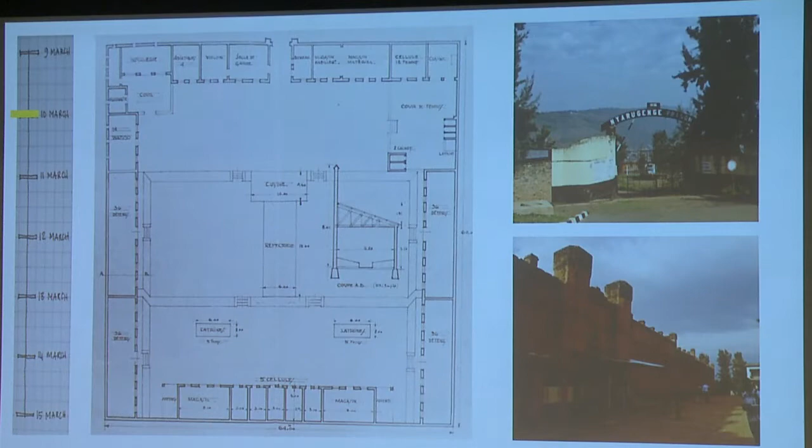And then the Belgian school, we were able to get access, but for that we unfortunately did not have any drawings. So there was a certain amount of information available, and the rest our students had to infer and assemble just by observation.

The workshop started with the Rwanda Arts Initiative, with Dorcy and a number of artists who came to present to our students and showed us their work, telling us what kind of spaces they would need and which spaces would be ideal to incorporate into the proposals.

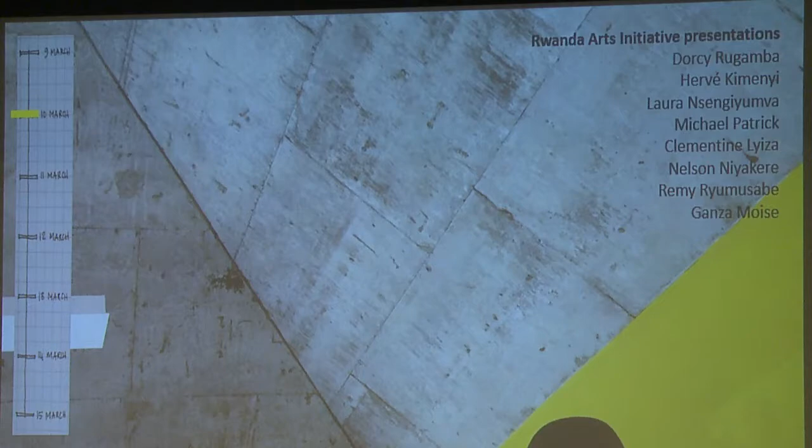From there the students also explored the local art scene in various ways. We went to the Inema Arts Center where some of them did artwork together with local kids, and a few of them also engaged in karaoke in Kigali Central. They immersed themselves in the life of Kigali and tried to experience as much of it as possible, just to get to know the place a bit better.

Work started in earnest on Monday morning. The students essentially had 4 days to work on the project. We started first thing on Monday and they had to submit by end of play on Thursday.

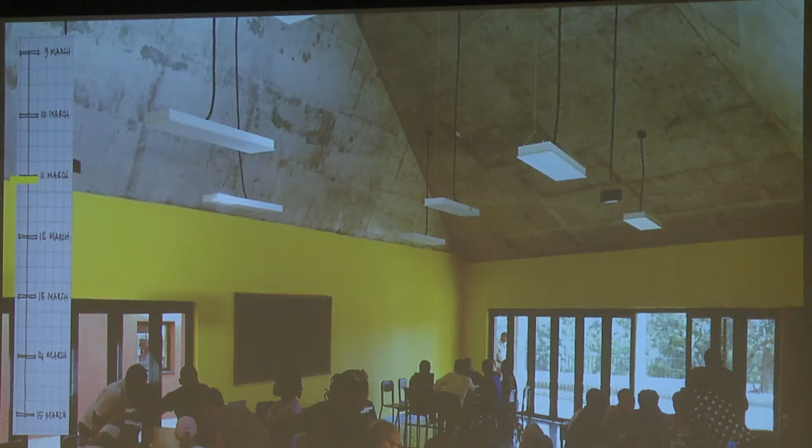The students from Uganda and from South Africa were challenged by the fact that they were away from home, and they had to improvise. With a lot of help from the local students they were able to get some laptops together, and they also used a roll of paper that Berend brought along, so a lot of hand drawing, and also some inventive use of apps available on their smartphones, which was really interesting to watch them adapt in the new environment.

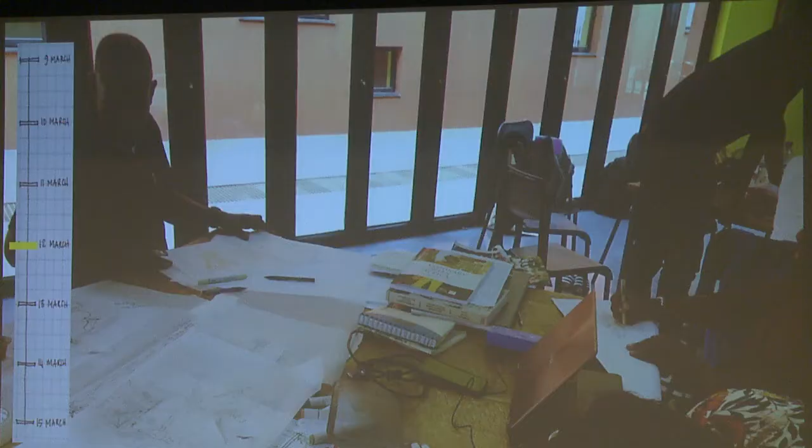So what we had was 2 moments - the workshop timing was divided into 2 moments, one aiming towards a target. We had 2 reviews.

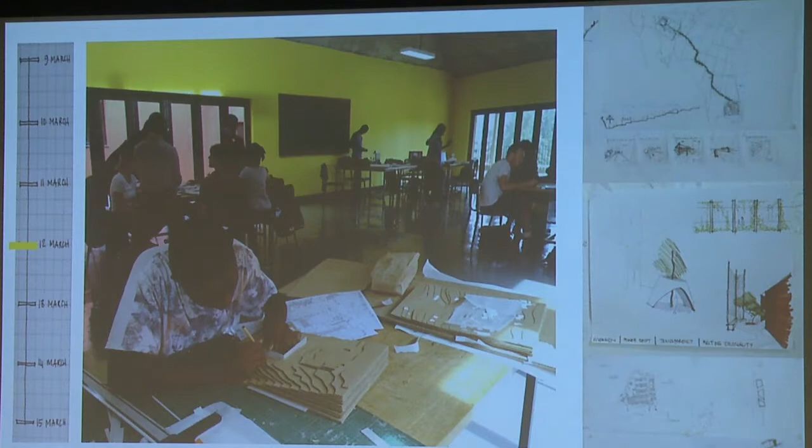The first review was with practitioners from Rwanda, who were invited to comment on the students. They had worked up some rough drawings and put ideas together, and these were discussed with the practitioners.

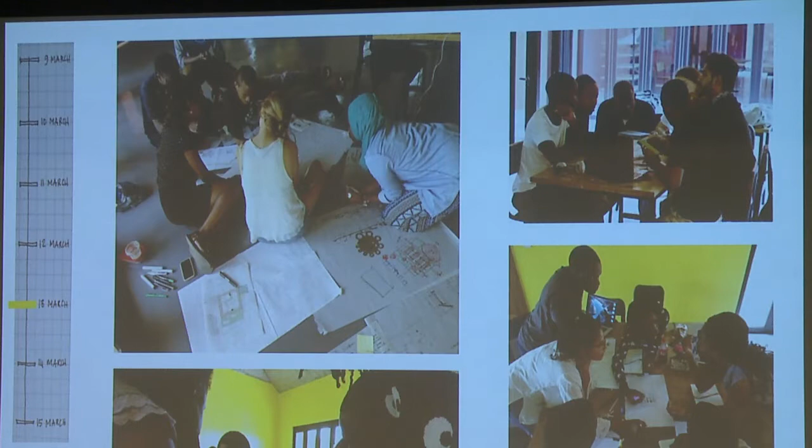The students then went back into the studio and continued to work on ways of communicating their ideas, and these were presented to international experts who have been part of this forum - Leslie, Thomas and Joe, who gave a very lively and insightful commentary. The students then went away and did further work to produce the posters you see at the school and the PowerPoints you'll see in a moment.

So what I'd like to say briefly is that this was a very short project. The students worked with very limited material in very limited time, with people they didn't know well and still had to get to know, so there was a lot of dynamic working in a group of 6 - a big learning curve for them, really exciting. But because it was really short with limited materials, it really is just a provocation.

We want to really emphasize the fact that the students have put together some images that are not at all indicative of what should be built, but are really there for conversation and provocation of discussion. In light of that, I'd like you to notice when the students present their work what emerged was a number of different ways to approach working with existing buildings.

You will see there are 3 proposals for the prison and 3 for the school. For the prison, we have a ranging approach: one that doesn't really do anything to the prison but uses it as a location to view the hill across the other side, another that occupies the prison without touching its materiality, and another more conceptual one that erodes some of the materiality of the heritage building to make a commentary. So it provokes different conversations around what you can do to heritage.

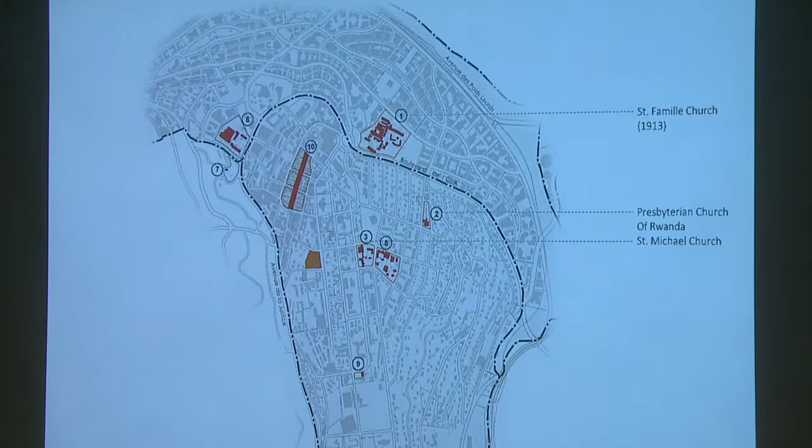We'll list them real quickly and then move on to the school. The prison is up there, from 1930. And that's where the school is.

As far as we could tell, the school was completed in the mid-1960s, after Rwanda had already acquired her independence. So we imagine the school was initially built for the remnant of the Belgian community in Kigali, and afterwards incorporated the more affluent local community. That's where we are right now, for reference.

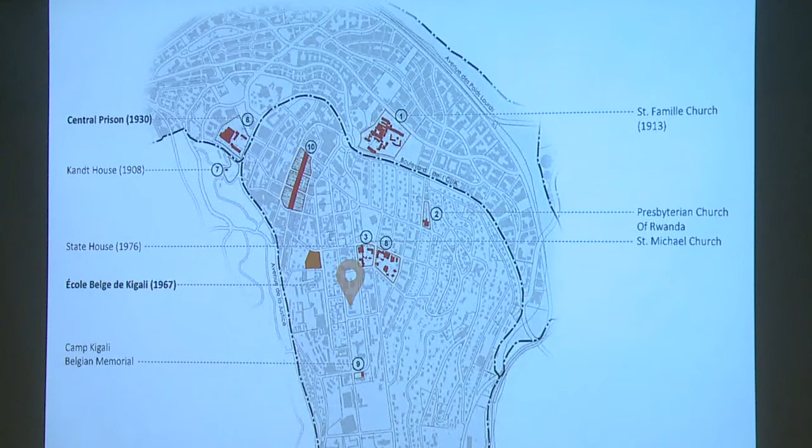Zooming in further into where the school is, you find in the properties around the school, the light blue spots are high-rise, commercial and residential mostly. To what should be your right, there is more planned, organized, and corporate architecture and businesses. And on the left, there is less formal stuff going on.

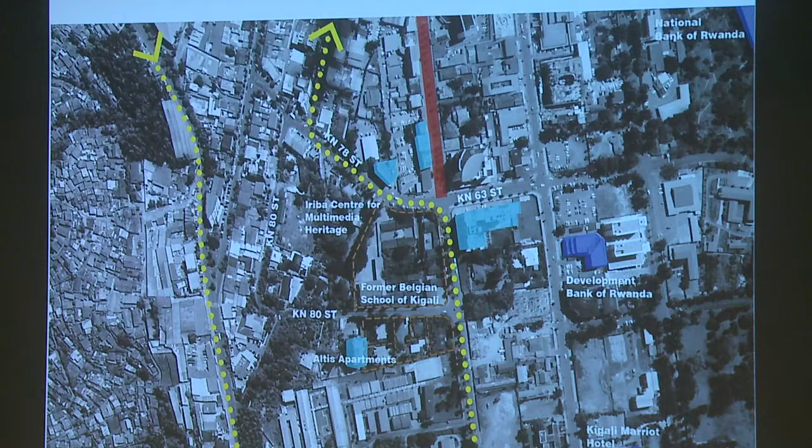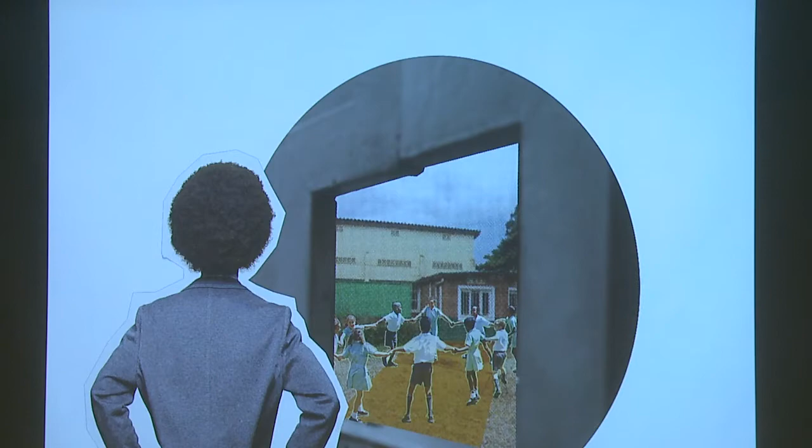On our site visit, we took note of how closed off the site was, the school in general. It was really closed off from the surrounding community, especially the locals, and there were boundary walls on either side of the streets.

We felt that this created a sense of exclusivity between the people within and those outside. So in our intervention, the aim is to break these boundaries, both structurally and spatially, to create a space that could be used by artists, professionals, non-professionals, and the local community. Basically a space that allows all to coexist without designated spaces. This way the space would be transformed from one that is exclusive to one that is inclusive.

From our analysis, there are several elements that we valued about the site. Those include the location of the site. It has access from 3 roads, and those 3 roads have varying traffic measures. Like we have the bus route.

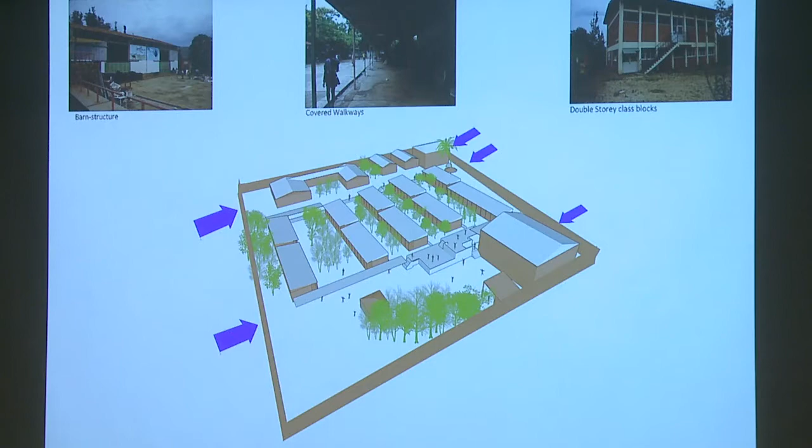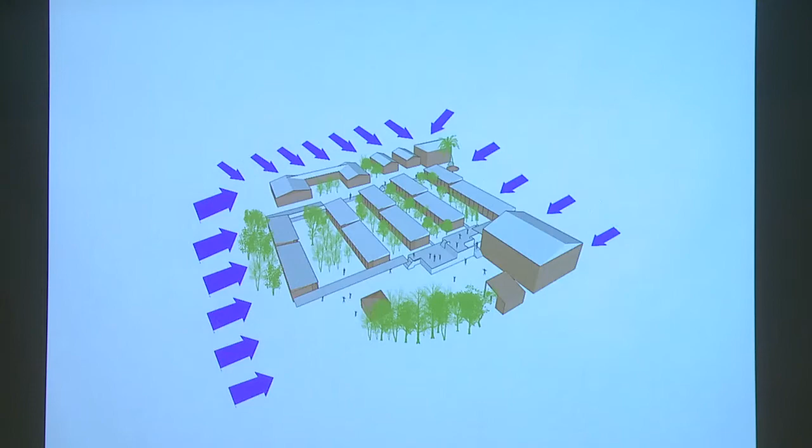So the first obvious move that we made was to remove the boundary walls that separated the city from the school, which allows people to access it from different street facades. Then the second thing that you can see in this running image is to demolish the existing roof structures, which were made from asbestos.

The third thing was to introduce disruptive interventions that connected the existing class structures together, which allows people to walk through between the classroom blocks. And the last step would be insertion of programmatic extensions, which would be building vertically upwards, especially mixed-use buildings that incorporate ground floor arcades for commercial functions, and artists' apartments and offices in the mid-rise sections of those spaces.

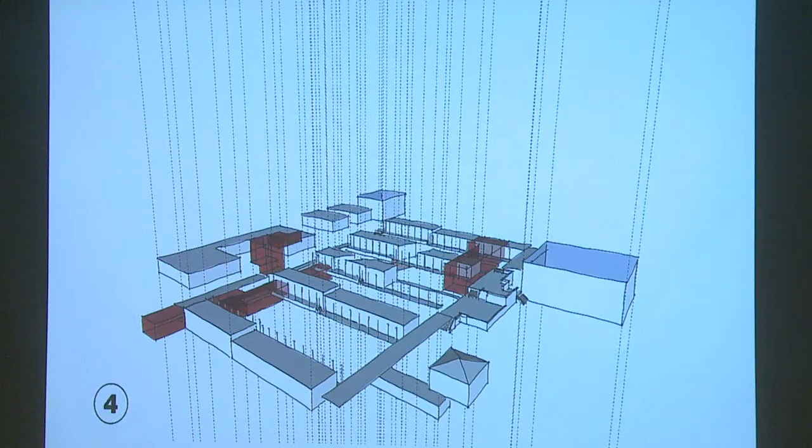This is just quite a provocative collage, if you like, of how we imagine the life within one of the courtyards to be after our intervention.

And it really is seen as an active work area or playground for creative activities where public and artists can intermingle, and it works on the value of the positive courtyard space that already exists in between the classroom buildings. In the background you can see an impression of the extended buildings on the street front that would accommodate commercial and office space, and a public walkthrough that would allow persons to filter through into the site below.

Thank you. As we said, the site will be open through this courtyard, people could just pass through like it's a public road, so the artists will be exposed to the public. On the commercial side, the building is somehow raised, which allows fluid passage through the site as a normal public space.

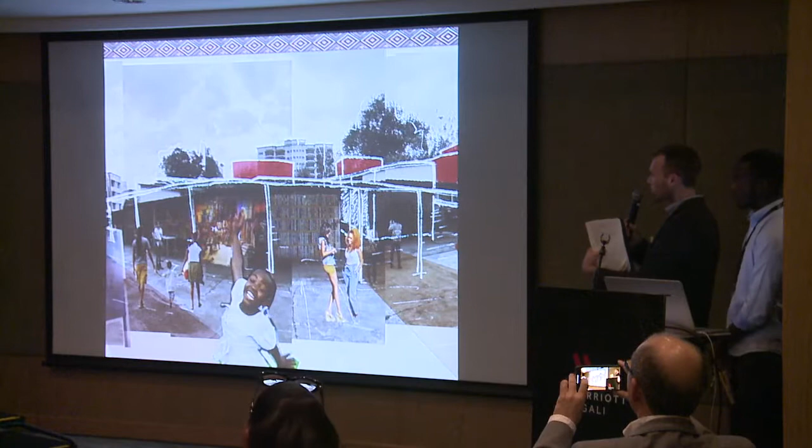And something else that could be useful is to convert the existing canteen and kitchen of the school to serve artists and public alike on event days. And that's it. Now we'll just be showing you a short video which summarizes and highlights the presentation.

Good afternoon. Our approach is socio-economical and applies urban design using small-scale interventions to transform the larger context. Kigali is famous for its many hills, which allows constant visual moments and connection to the city. We believe and value culture as an art, which seeks to improve life through thoughtful change.

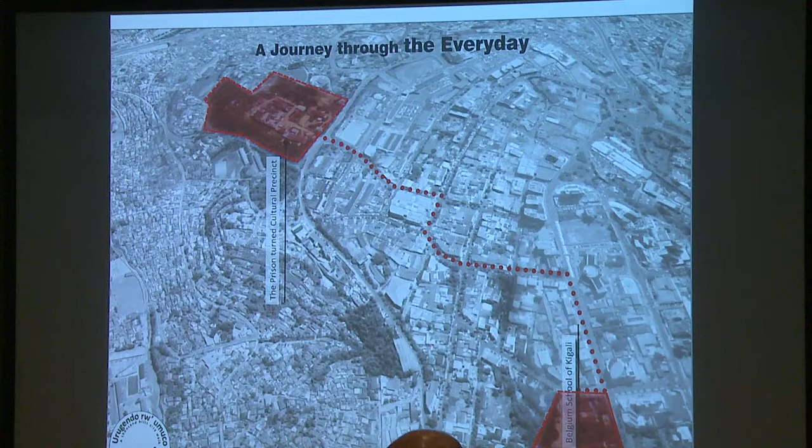Here we show a journey through the everyday, a sample of the journey that people can take, joining the Belgium School of Kigali to the old Nyarugenge prison. The video that follows shows a journey of the everyday through one of the sample paths that we chose.

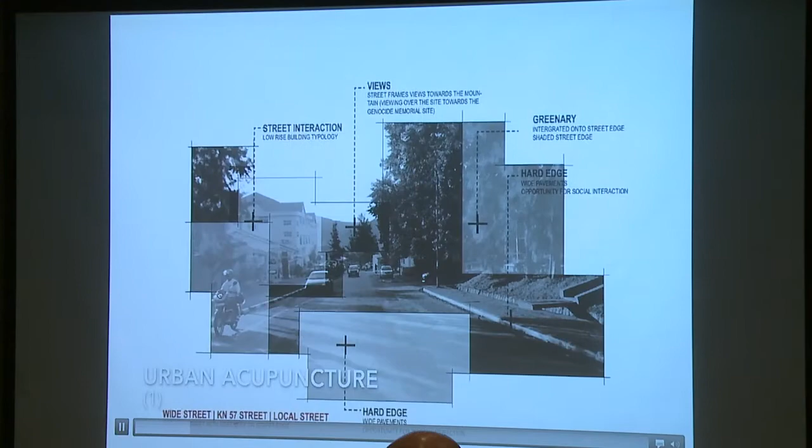[Song performed in Kinyarwanda and English, with lyrics including: Since the day we met I've never been the same, I appreciate, Lord I say thank you Lord]

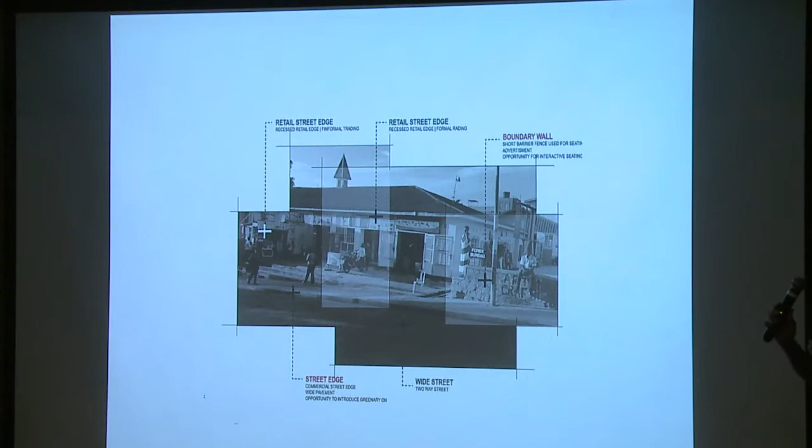The second slide shows more detail of both formal and informal retail street edge, and a boundary which is used in this instance for seating. Wide pavement, we can see the topography, which can also start to be integrated to actually allow the public for seating and to enjoy retail spaces.

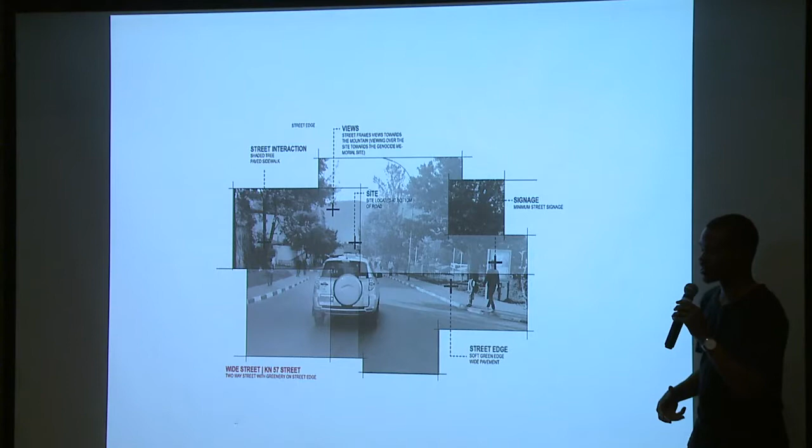This last illustration is the one towards the Kigali prison. It shows very great background views, integrated streets, and greenery, and all of these elements and aspects start to form the basic building grounds for potentials for interventions.

This slide further illustrates the journey through the example journey which we've chosen, from the Belgium school to the Kigali prison, and where we can start to actually integrate these interventions.

The first intervention along the path basically shows us recognizing green spaces as quite vital spaces which you can start to integrate along these pathways to allow them to be more viable and more walkable.

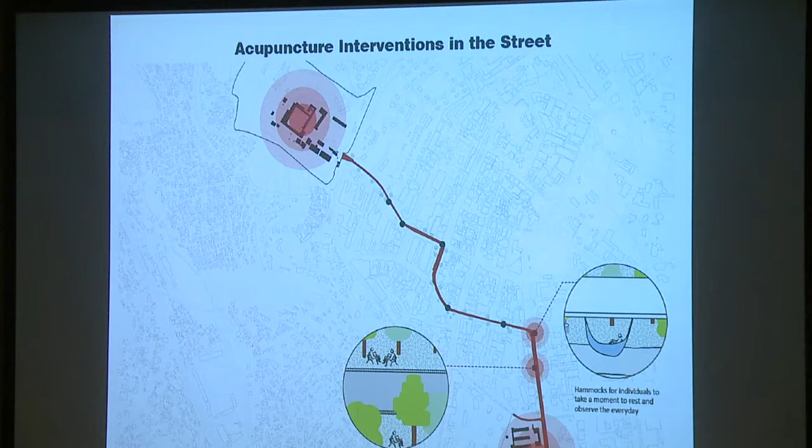The second intervention can also seek along the path to have rest spaces for the community, which are some of the lacking elements within the city walk, which we can start to play with and integrate within the city fabric.

The third one is a reference from an example in Italy, where we can start to look at the history of Rwanda as a whole, and start to use the pavement along the streets, putting monuments along the paving to celebrate the history and also to give allowance for the future.

This is also picking up from one of the street nodes, which is the retail node, and if we can enhance these spaces, they can start to allow for a more creative and interactive street edge, which will work with commercializing the street edges.

This following one as well looks at using the slopes of the city to actually start to form these terrace platforms, which will work with convergence and allow interaction between the general public for performances, for seating and resting spaces.

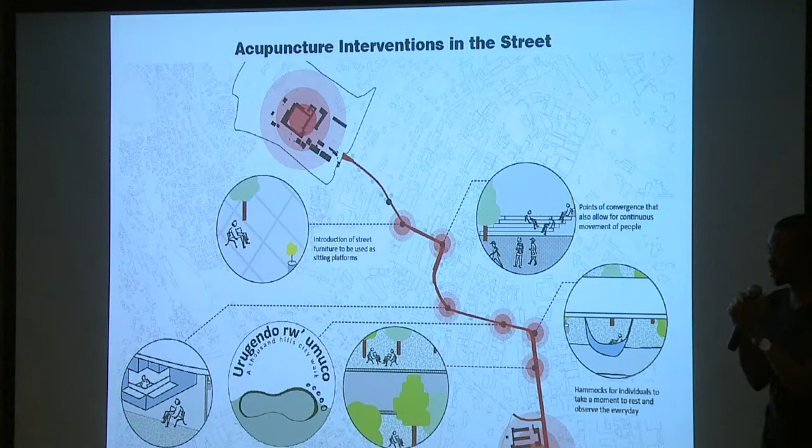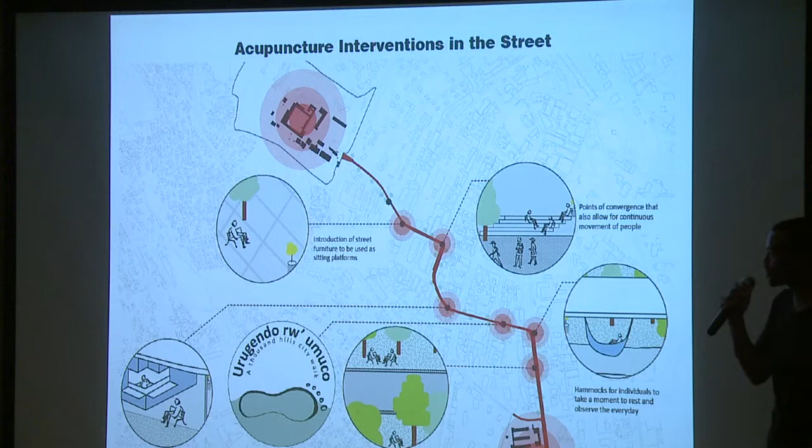The other one looks to introducing more urban furniture along these paths, which will further enhance the usability of these walkable pathways. The last one looks at more formal shaded spaces along these pathways.

This is the site as you approach the prison, and from here you also have great views looking over the prison site, into the Genocide Memorial Center, and this starts to integrate the tangible and the intangible works of this intervention.

So we looked at how this journey can be a continuation both in the school and the prison, and some of the interventions we suggested were just small changes of what is already existing.

This shows a space we identified that we could still maintain its value, the warehouse that we found at the Belgian school. What we're proposing is to open up this structure to a nice public space that is already existing.

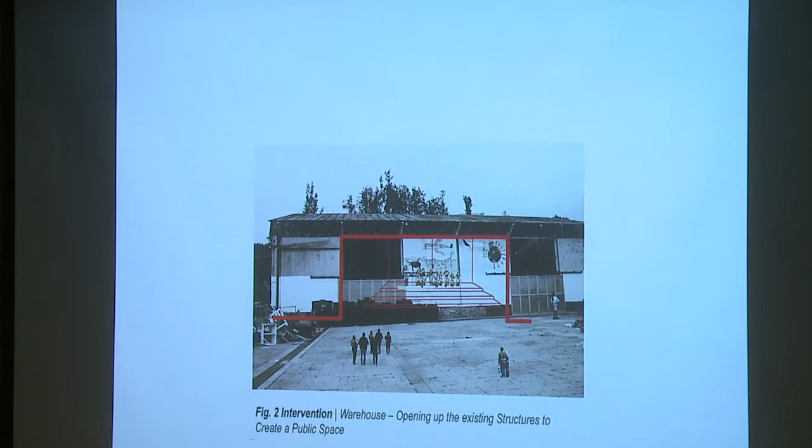This is also seen in the other interventions we found. We also found that at the school there are these corridors that open out to the courtyard along the classrooms. What this could essentially become is also a space where artists can use as an expression of their art, or a platform, and these spaces can open out to the courtyard.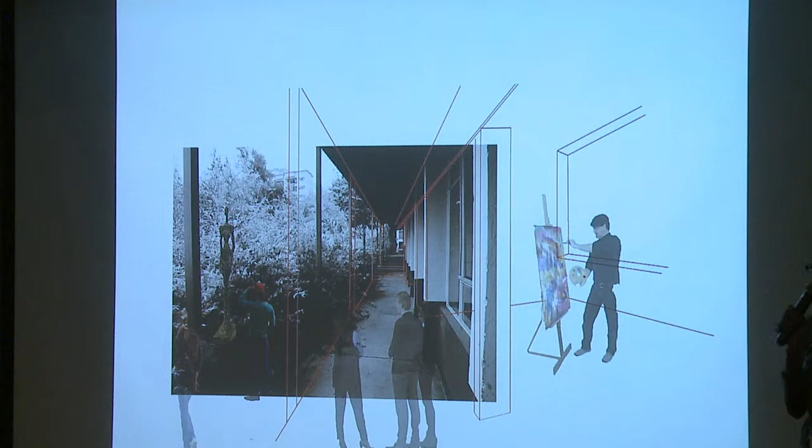This becomes also a collaborative space for the artists to pass on knowledge to children, the public, or community. We also identified a number of open spaces at the school, and this one mainly at the entrance we have suggested to become a public event space or performance space for the artists.

Thank you. Going to the prison, founded in 1930, we also think about the architecture of this prison. We wanted to keep the existing architecture as it looks, and also make a little intervention on it.

By introducing the entrance, changing the entrance by introducing the entrance of a traditional Rwandan hut.

We want also to make it so they can exhibit their works, those artists. Okay, so...

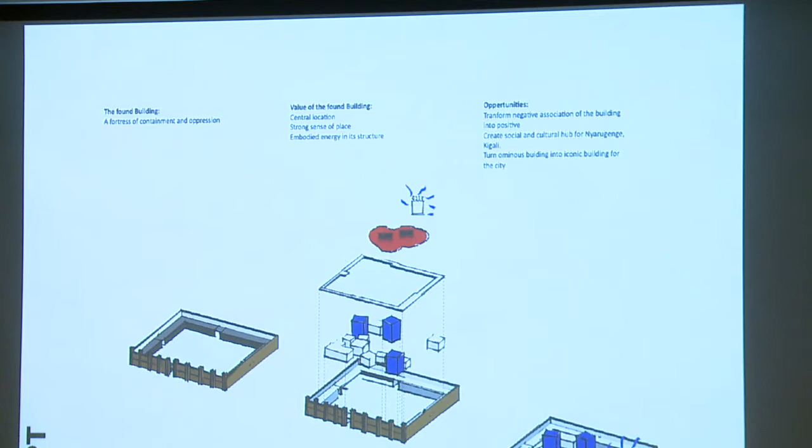Reimagine. We paid particular focus on the internal courtyard, on how we could reimagine the experience of that space, as well as the role that space could play for the citizens of Kigali. In this case, we thought possibly a space of gathering and performance. The form of the new courtyard was informed by studying the site, the solar patterns, the slope of the site, and what kind of forms would naturally support a performance space of that scale.

The new courtyard would then redefine the space. It would provide an ordering mechanism for the programmatic functions.

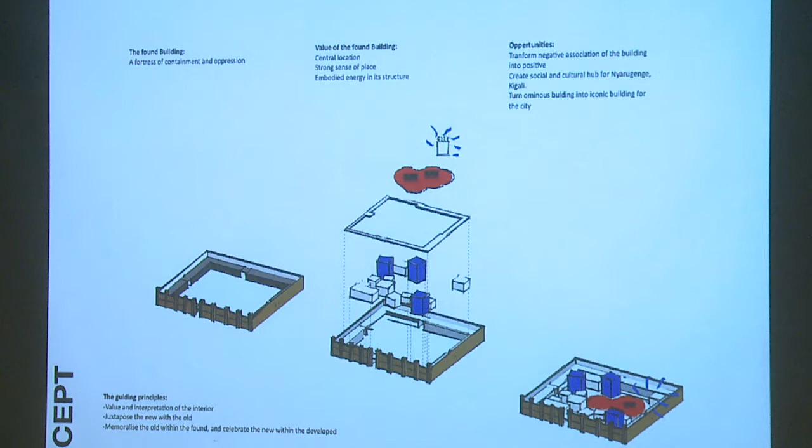Insert. We insert new building units, or pods, that would then define the edge conditions of the new courtyard. They could accommodate production space for artists, as well as the ancillary functions necessary for productions or for an event space of this scale. They would also subdivide the remaining space of the old courtyard and allow for organic flow and circulation within that space. They could be of various sizes according to the programmatic requirements.

So the new pods, as previously mentioned, are juxtaposed against the existing building, but there's a corridor in between, creating what we are terming the corridor of reflection. As you're passing through that square corridor that surrounds the existing building, the experience is of both the new and the old. Paths from that corridor lead into the central courtyard, which is the heart of the entire project, and can be an event space, exhibition, or gathering space.

So we'll try to look at the kind of creatives we have, and the pods, the new spaces, could be used for the program we looked at. They could be making spaces, creation spaces, for the creatives. Then the existing building could just be given a facelift, and given its significance, it could be more reflective, so it could house spaces for reading, studying, like a library, a museum, a skill center, and such.

So the central courtyard is at the heart of this creation. The pods that we have produced frame the courtyard, giving it shape, and also acting as a backdrop for what we're trying to illustrate here.

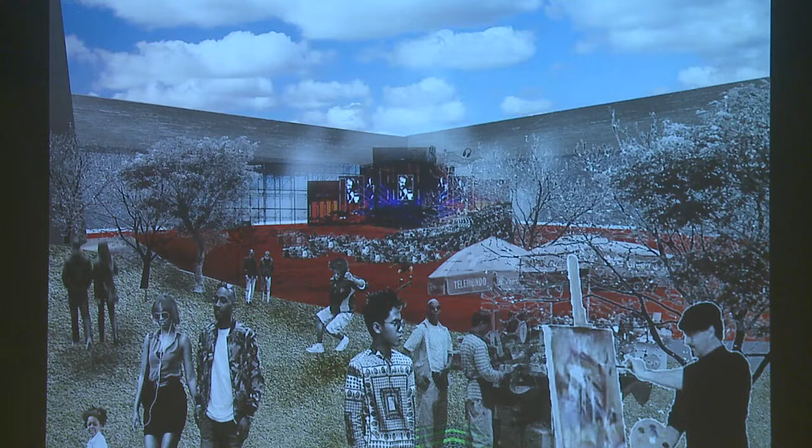Maybe a group of people could come and watch a movie, or have adverts, theater opportunities. During the day, we can have a more active, fluid space, where you can have different artists perhaps painting in their spaces, maybe having a show in that gathering space, a space of reflection, having a food court, different activities happening within that space, making it the heart of the entire project.

The working spaces in the pods tower over the existing wall to visually emphasize the value and importance of the artist's work. At night, these pods light up and can be seen from the neighboring hills, acting as a beacon for the community and making real their aspirations for the future.

As people leave the busy street, the park acts as a foyer for the courtyard, providing a place not only to relax, but to spend time away from the intensity of the commercial bustle within the city. Following the Kigali 2050 master plan, the park is projected to increase the value of land around it.

So in the greater scheme of things, it would be very irresponsible of us to just concentrate on the buildings and forget that they sit in a landscape. If you look at Kigali and the way they are developing, there's a number of green spaces being put up, but they are not being utilized very much. We're trying to open this to the public so that we can have green spaces that are both useful and also help increase the value of the space.

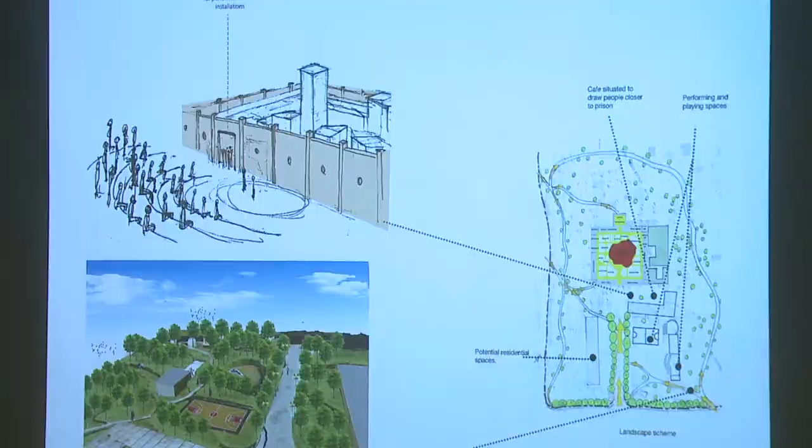So what we're trying to create is an innovation and cultural park that is for the community, irrespective of age and status. Thank you.

We are a team consisting of 2 students from Uganda Martyrs University, 2 from University of Rwanda, and 2 from University of Cape Town. Our project is named Izuka, which translates to an essence of rebirth.

And we translated this into our project through the metaphor of a tree, with the landscape retaking the buildings.

While looking at both buildings, we found similarities in both existing structures. They are as follows: a layout that speaks of order and control, multiple levels of hierarchy, particularly referring to the slope as well as the colonial histories of both buildings. Both buildings lack accessibility, both visually and physically, and both have high levels of security.

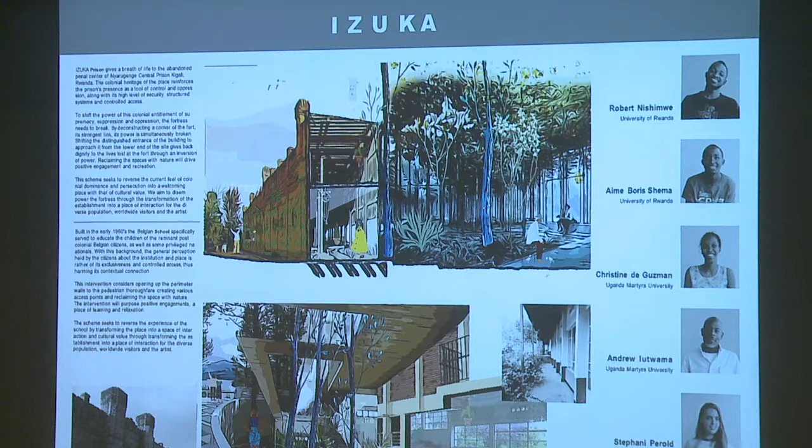These things are not conducive to the artist's methodology. It's very rigid, and we decided to break down the aforementioned structures and invert them for the project to be successful for a range of users. I'll now give over to Andrew, who will tell you about the school.

Good afternoon, thank you Stephani. The school, as we've heard, was built in the 1960s for the education of the children of the Belgians, and later became a place of education for the affluent few who could afford it.

From our analysis of the site, we found 3 elements that stood out for us and that we wanted to work with. One was the nature in which the school was closed off from its context, probably for security. The second thing is the systematic organization of the buildings, probably for administrative and security purposes.

One of the lovely things we saw was the use of site. The buildings conformed to the slope, and that is one of the issues we'd like to keep or enhance in our intervention.

When it comes to interventions, instead of having a closed off site, we're hoping to open up the site for public thoroughfare to be able to walk through, so that the user of the space and the public can merge.

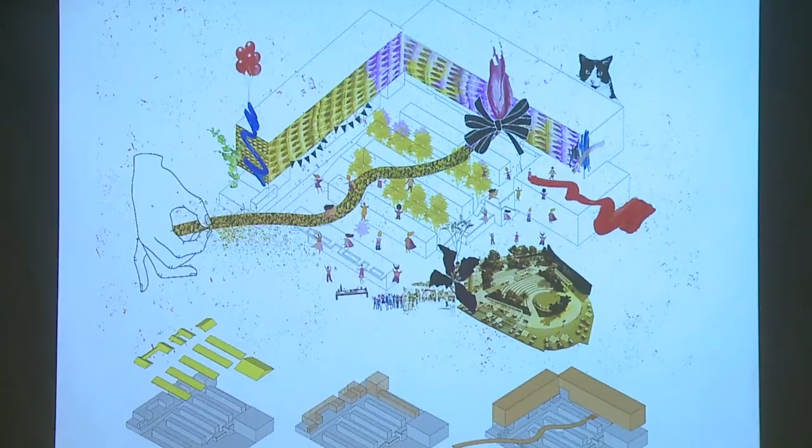So the quality of spaces we are proposing is, as you can see, on your right lower corner we have the interior spaces where the artists have individual private working spaces where they can bring to life their creations in a secluded space.

The interior spaces open up to a courtyard, which is an area that enables collaboration between the individual artists. You have the visual artist meeting the filmmaker, the public possibly meeting the artist, and the children meeting the people they look up to, learning from them, and possibly the artist learns from the public as well.

Now, from the courtyard, we have a walkway that rises to the mezzanine level, where the pedestrian can observe, look into the courtyard, and see how the work of the artists comes to life.

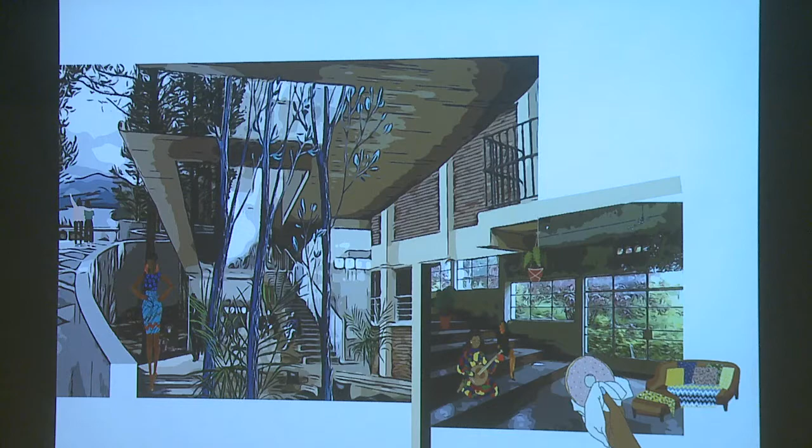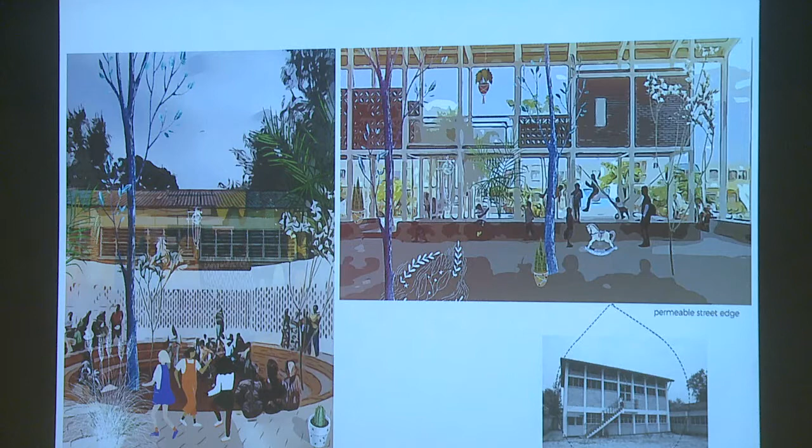On the street level, we have interventions of varied transparency into the site. On your left, we have an amphitheater space where we have performances, and people passing by while looking across the porous partition into the workspaces of the artist.

On your right corner, we have the existing structure of the school without the partitions. We remove the partitions from the existing structure so that the artist is able to create the kind of space they want to work in based on their needs.

It also enables the person on the street level to look into the site and see what is going on, and get enticed to get into the cultural center.

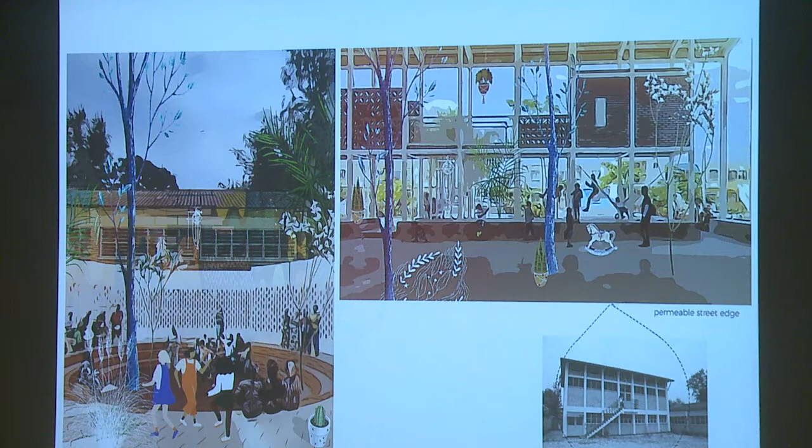The prison, being built in the 1930s, provided the feeling of colonial oppression, and being a bit in the valley, pulled from the city, it also provides the feeling of depression.

So our scheme is to shift this power of colonialism, break the corner, and shift the interests. So instead of coming down to the valley, you are now shifting the interest, and you are going to move uphill.

We also want to give it back to people, give it back to the city. So we also have this central courtyard, which will also be a pause for the city, and it also hosts the diverse population of Rwanda, and worldwide visitors and the artists. Thank you.

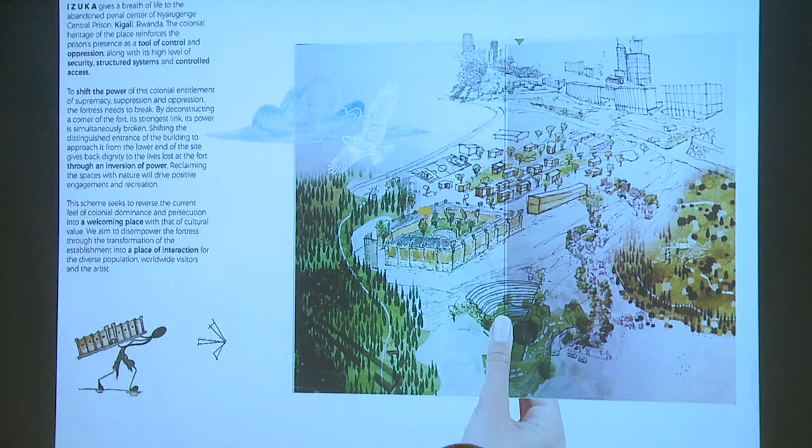Okay, thank you. We have summarized the design process into two big ideas. The first one is breaking up the corners, and the second one is planting the facade.

For breaking up the corners, our aim was to disempower the colonial fortress, so that we could change this prison into a place of social interaction with a diverse population within the building. We saw that it could be a good idea to give this building new entrances.

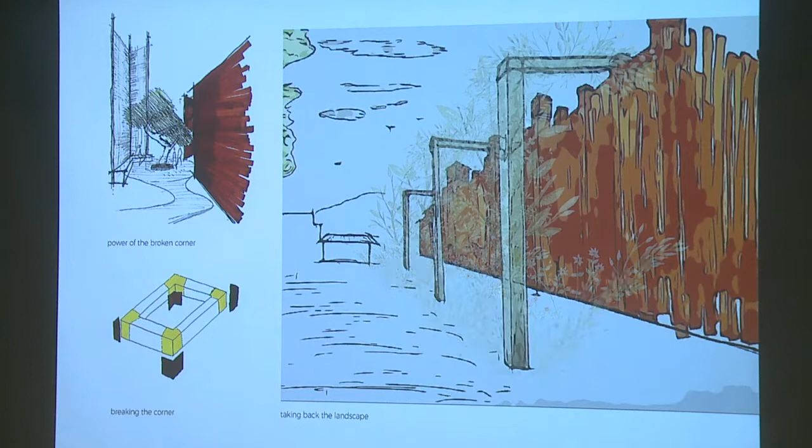For the second, planting of the facades could bring back nature within the space in a series of creepers, and we saw that it is a good way of relating the building with the surrounding landscape. Thank you.

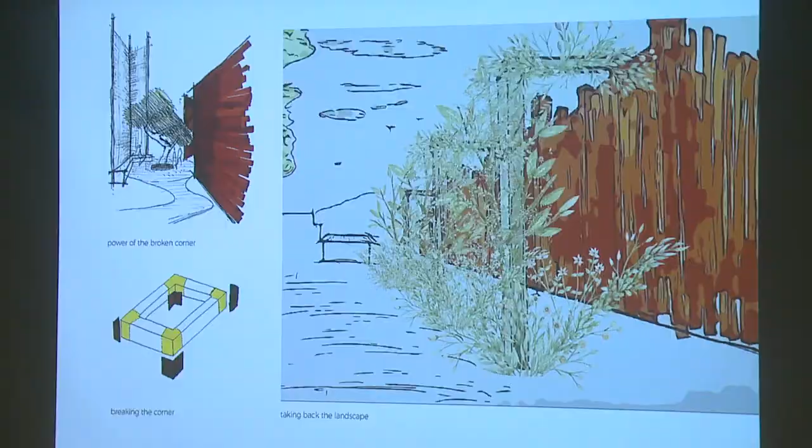The final conclusion. If I could just ask everybody to please bow their heads for a small second and hum. Okay, like this. Hum. Guys, group participation. Hum.

Okay, you get the point. That's what we imagine the space to feel like. So, after planting the facade, and there we go.

We have a pointer. After planting the facade and bringing nature back into the building, breaking the corner, we allow access into the building. So how we went about doing this was we have the corner, we disassembled and deconstructed the power.

We then applied these bricks that were used in the corner onto the floor, this idea of walking over this colonial power. In traditional Rwandese culture, there's the symbolism of planting a seed over the lives of someone lost, and that is exactly what we aim to do over this brick.

So now we have this tree of memory that then grows across. Instead of filling our courtyard with immense function, we decided to create this homage to the lives lost within the space, and the lives lost greater than the space, hence this.

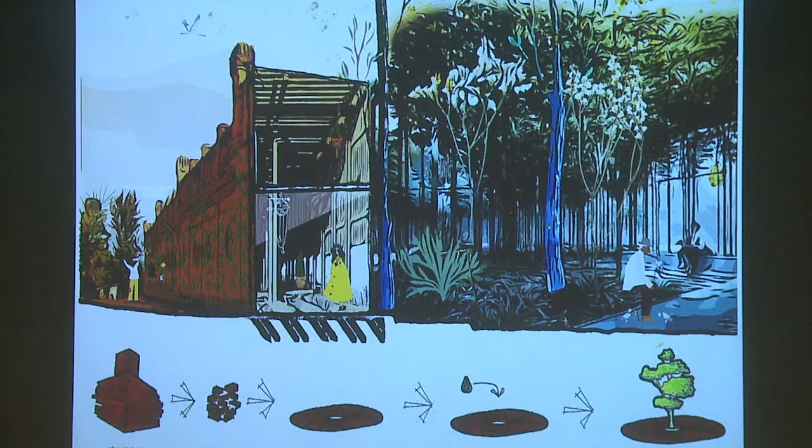So we have our gallery and our museum space within the existing structure after we've inserted this mezzanine, and then we have this really powerful space with a clearing in the center for a really intimate performance with no direct path, because we found that it was really apt for you to meander through the trees and really feel the space.

Moving forward, as my team has said, is the slope. Instead of going down, which was current, into the building, because the fort was put into a space of death where people were left to die, we wanted to subvert this power by increasing the journey to go up the hill, regaining that power and shifting directions. Also using the landscape on the site, we've inserted an amphitheater that looks toward the building as it's green. So this process then happens over time, because change is not instant.

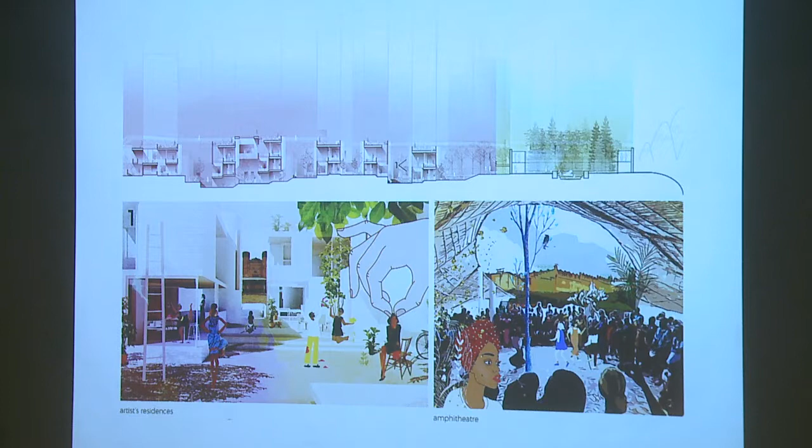Seriously, guys? Thank you. Are you taking over? Oh, no. Okay, I will let you. Just thanks to all the presentations. So now we're going to ask Fasil Giorghis, a professor at the Ethiopian Institute of Architecture, Building and Construction from Addis Ababa, to act as a first respondent to the 4 proposals and offer some comments. And then we're going to try and moderate a Q&A between the students and the audience. So thank you, Fasil.

Thank you for inviting me here and also to be part of this very interesting series of discussions and the forum, especially Kathleen and all the organizers, Bozar, and so on. Adaptive reuse is also one of my passions in this profession. And it's a great idea to involve students from 3 different universities to come and work together, because the students are our future. Students can come up with crazy, very creative ideas. So congratulations to the organizers.